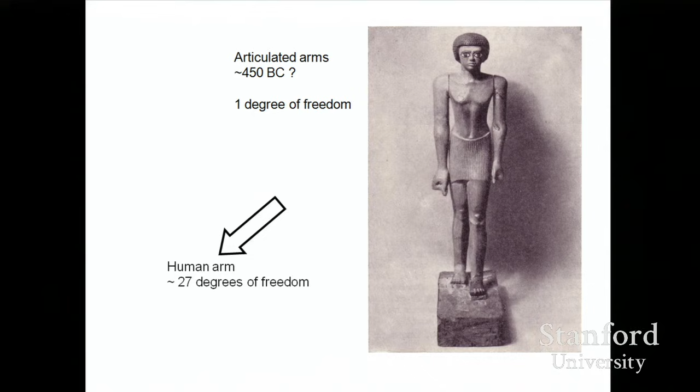Here's the first example of articulated arms. The arms can swing; they have one degree of freedom. By comparison, the human arm has approximately 27 degrees of freedom. There isn't a robot on the market yet that has anything approaching 27 degrees of freedom, but think of all the degrees of freedom and what you can do with it that this kind of machine cannot do.

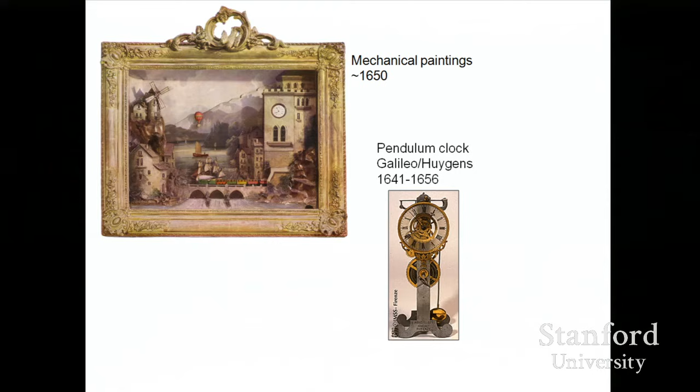Really, the ancestor of this is the pendulum clock, which was invented by Galileo and then perfected by Huygens. And that dates back to a much earlier device, namely the clepsydra, from several hundred years before the Common Era.

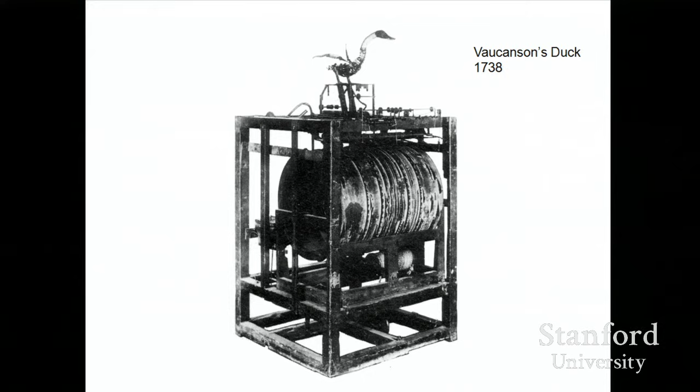In the entire history of robots, I consider this to be the most remarkable of all: Vaucanson's duck. It's shown here so you can see the cams with the covering off. But you have to imagine this covered over and the duck itself covered with feathers so it looks like a real duck. People would pay, come into an audience, sit down, and wait for the operator to start the show. The operator would turn it on, and the duck would look around the room, and you could see from his expression as he stretched his neck in different directions that he was looking for food.

So the operator would put a container with food in front of the duck, and almost immediately the duck would start dipping his beak in and swallowing the food very rapidly. Then you could see from the pained look on his face that he ate too fast and had a stomach ache, and he looks more and more unpleasant as he flaps his wings. Finally, he gives a grunt and relieves himself on the table, and a chemical smell spreads out through the room. It's wild applause at the end of the show for Vaucanson's duck.

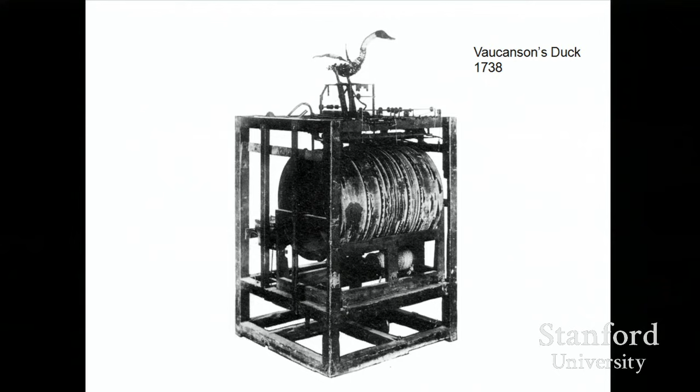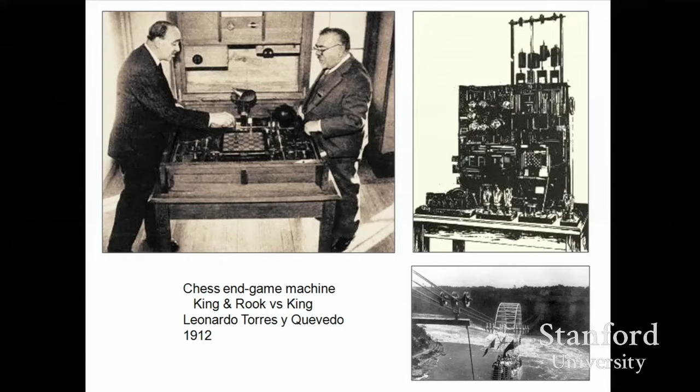The first actual chess-playing machine of any sort was invented by a guy named Leonardo Torres y Quevedo, shown here demonstrating the machine to Norbert Wiener. It's a mechanical and electric machine, and all it can do is play king and rook against a king, which is a rather simple ending. He's a bit of an inventor - he also built some sort of cable car that goes over Niagara Falls, although I doubt it's still in operation.

Some people would argue that the thing that really characterizes animals is their ability to respond to a changing environment, which is the concept of feedback. The first illustration of feedback in engineering is the use of windmills that could automatically steer towards the wind. At least I believe that's the first. If anybody knows of anything earlier, please tell me.

Now I'm going to get into robots in the context of artificial intelligence. There were four challenge areas that people identified. One was, could you make a robot that could play chess, because that would demonstrate intelligence, which is surprisingly animate. Could you have robot vehicles that could demonstrate mobility, or vision systems that could do recognition, or arms that could do dexterous operations?

With regard to chess, in 1968, John McCarthy and Marvin Minsky, the two people who coined the term artificial intelligence, said that within 10 years, a computer program would be chess champion of the world. David Levy, who was a senior master in chess, didn't believe them, and he said he was willing to bet 1,000 pounds that they were wrong. So each of them took on a bet of 1,000 pounds. Ten years later, he won that bet - it didn't take 10 years. It took nearly 30 years, until IBM Deep Blue beat Kasparov in 1997.

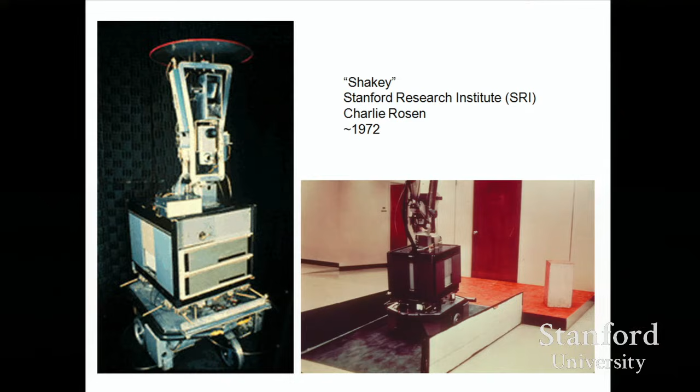Shakey was given a task of planning, which is a wonderful task involving intelligence. Here, Shakey has been asked to knock that block off the platform onto the floor, so Shakey has to first figure out where the ramp is, then push the ramp in place, then roll up the ramp, and then knock the block on the floor. So it's a sequence of planning steps, and the computer could do it.

Hot cell teleoperators were invented around 1944, 1945, because people were starting to build nuclear weapons, and they needed to handle very radioactive materials like plutonium and fabricate things in a shop. And so the issue was that they couldn't actually be there.

So they instituted these systems with a lead glass shielding window where the operator was on the outside, and whatever he did, the pantograph linkage mirrored it so that the same thing was happening on the inside. And a few years later, it was necessary to add force reflective servos because otherwise the operator didn't know how hard he was grasping anything.

The word teleoperator has sort of gone out of vogue. Nowadays, people use the word drone, even if it's not necessarily an air device.

Ernst was quite insistent. He said children learn to function without any prior knowledge of trigonometry, kinematics, dynamics, or control theory, and therefore he absolutely refused to put trigonometric functions into his computer program. It was a matter of principle for him that he wanted to imitate what children were doing.

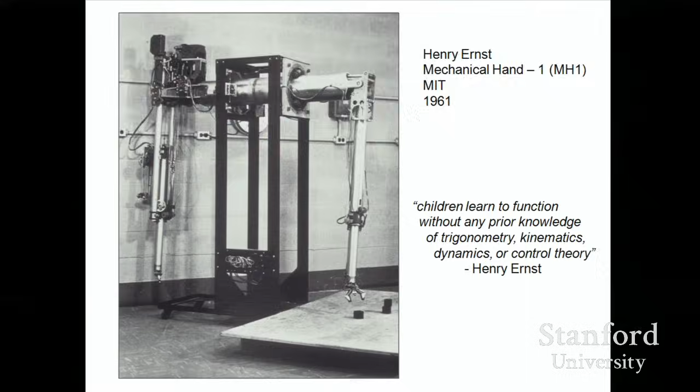1974, other things were happening, by the way. Victor Scheinman had designed the so-called Scheinman arm, and lots of universities were getting them. There's one, I think, that's on display here in the lobby.

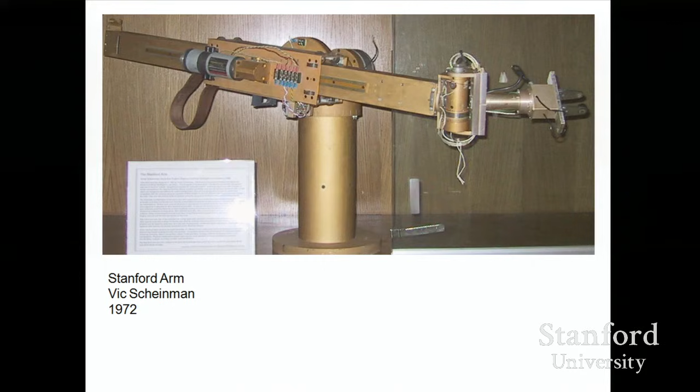And in 1974, at the AI lab at Stanford, Lou Paul programmed it to solve the instant insanity puzzle, where each cube has combinations of colors, and the challenge is to stack them all up so that each column has all 4 different colors. But you can see that when the camera is looking at it, it might see only 2 faces at a time, or 3 for maximum.

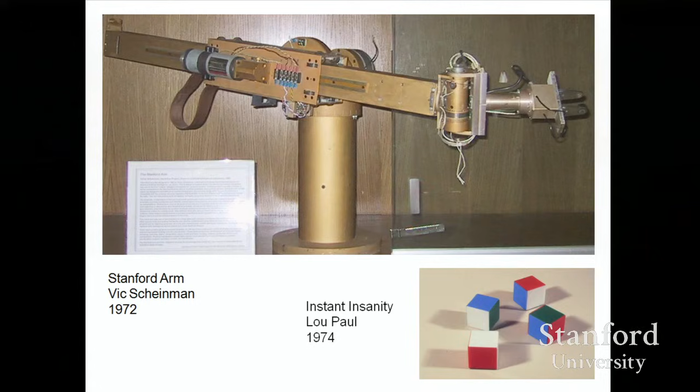So the first part of the program, the robot has to pick up blocks and turn them around so the camera gets to see all the faces. That takes about 5 minutes. It then solves the puzzle. That takes about 2 milliseconds. And then it stacks them up with the solution, and that takes another 5 minutes, and usually the stack doesn't fall down. In the process of doing this, they had to write a very general program, something that could take anything and turn it upside down. Absolutely anything, provided it's a 1-inch cube.

And here's Freddy the robot at the University of Edinburgh. Donald Michie wrote a program on a very large computer for its day. It's significantly smaller than my cell phone today, but this robot arm, which dangles down from the ceiling, is huge. And there's an XY table on the floor, which is again huge.

And initially there are 7 pieces for this. There are 4 wheels, 2 axles, and a body in an aimless heap. And the camera looks at it, figures out what's what, palletizes it, and then over the course of the next 8 hours assembles this. This led to some criticism in England, and I'll talk about that criticism later on.

Now we'll talk about useful robots, because none of these robots was useful. As Aristotle said a long time ago, when the loom spins by itself and the lyre plays by itself, then man's slavery will be at an end.

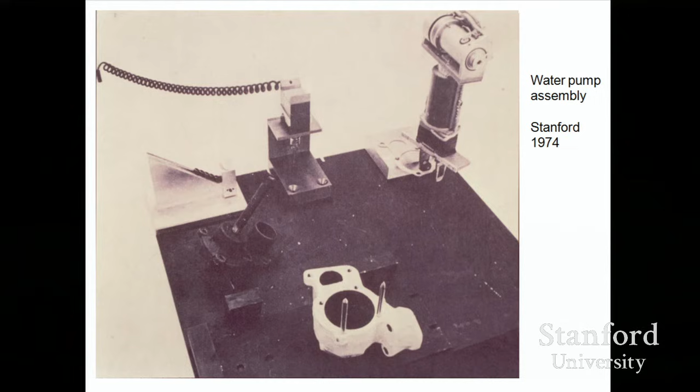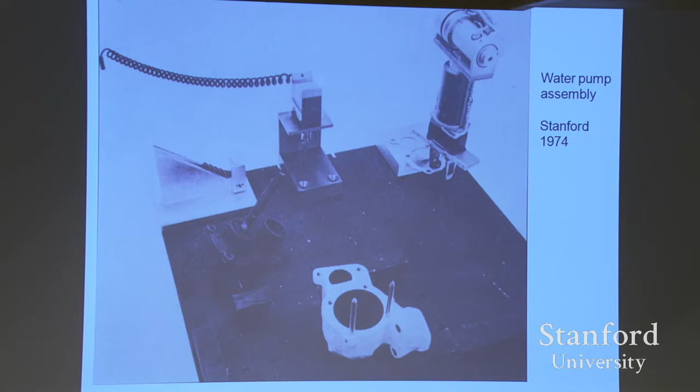In 1974, the people at Stanford decided they would actually try to demonstrate something useful in a robot, and they demonstrated the water pump assembly, where the same Scheinman arm picks up the water pump base, puts it into place, gets 2 locating pins from holders, puts the pins in place, gets the gasket, puts that on, gets the top, puts that on, picks up the power tool, gets a screw from the screw feeder, runs in 1, 2, 3, 4 screws, puts down the power tool, returns the 2 locating pins to their holder, picks up the tool again, and gets the last 2 screws and runs them in. About 5 minutes for the operation, and I've been told it was about 30% reliable. But it is certainly the first demonstration the robot could do anything remotely useful.

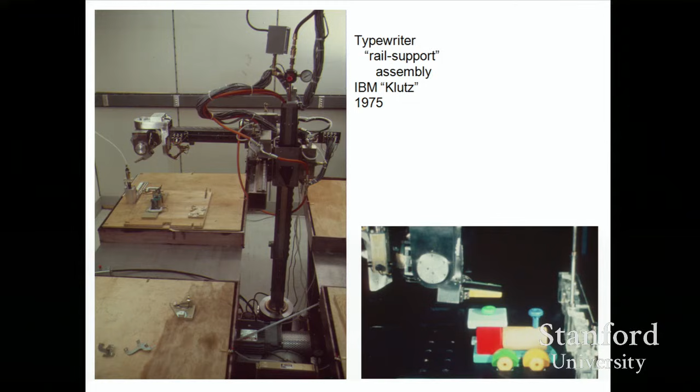Shortly thereafter, a project was started at IBM. I was one of the people on that project, where we put together a robot we affectionately called Klutz. The first thing I programmed it to do was to assemble the 16 pieces of the Mattel Build-A-Train. Within a year after that, other people were programming it to pick up power tools and assemble what's called the rail support of an IBM Executive D typewriter. It was kind of impressive to watch it assemble 25 pieces from that typewriter.

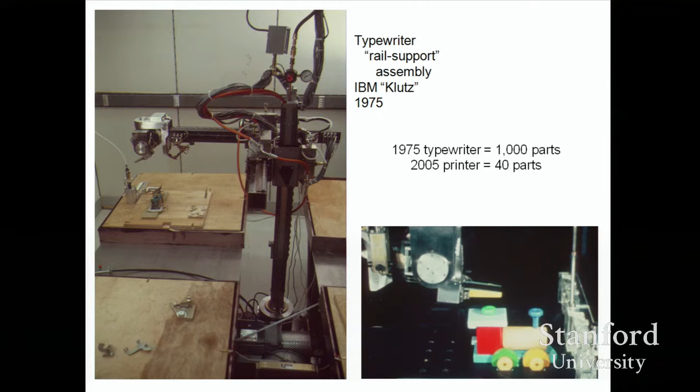But there's a lesson in all this, and that is that this 1975 typewriter had 1,000 parts. By comparison, in 2005, I added up all the parts in a typical HP printer. It was about 40 parts, and I think it's probably gone down since then. The point is that designing things for ease of assembly very often eliminates the need for robotics completely, because it gets so easy to assemble that people can do it very, very quickly. Assembling 1,000 parts was a big challenge. Assembling 40 parts or fewer is not much of a challenge anymore.

I enjoyed writing a program. There was an infrared sensor, an emitter in one finger and a receptor in the other finger. So I wrote a program that simply waited forever, and if something went between it, it would try to grab it, which would make it the world's 2nd most expensive flycatcher.

That, of course, leads to the natural question: what would be, in all history, the world's most expensive flycatcher? Does anybody know? Well, it's Barry Bonds. Anyhow...

Speaking of baseball, around 2005, there were some reports out of Japan that they had developed a robot batter that could hit a ball at 200 miles an hour, and a robot catcher that could also do that. I'm skeptical when I see balls on the floor here that clearly it's fouled off or missed completely.

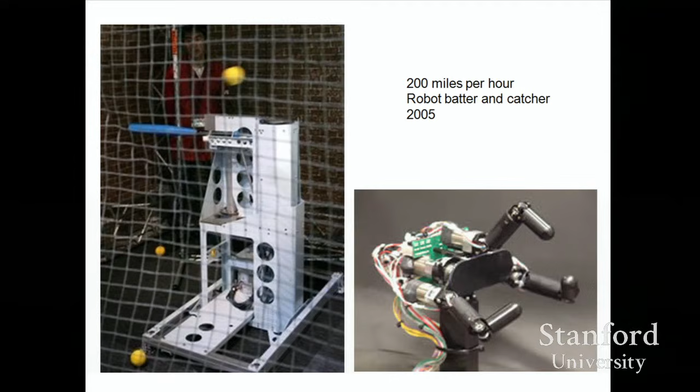1983, IBM came out with a product called the box frame robot. Believe it or not, that's me in the picture. I had a lot more hair then, and it was a different color. One of the things that we did in the early years was see if we could get it to pick up a raw egg, and it's astonishingly easy to get it to pick up a raw egg. There's no challenge at all in that.

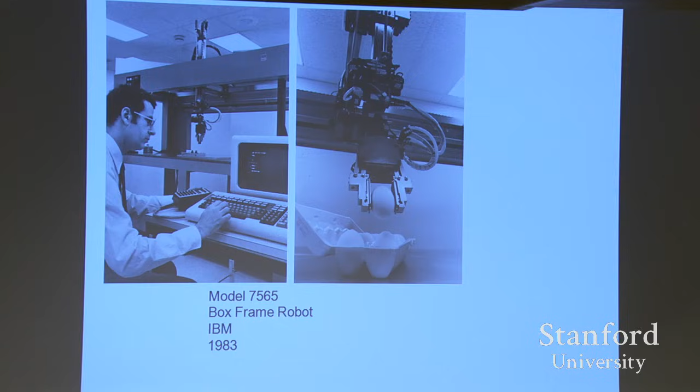Now, you may think that this is a strange product for IBM to be selling, and they only sold it for a few years before giving up on that field. But in fact, back in 1930, IBM was selling a precision cheese slicer, which is even more strange.

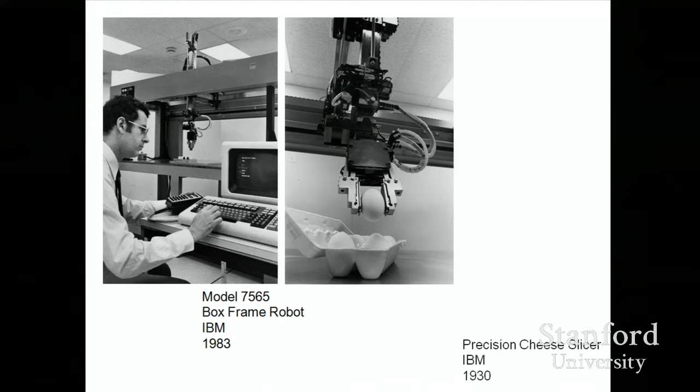When we were doing this, some people said, hey, wait a minute, robots are going to take away the jobs of a lot of people. We were skeptical of that at the time. In fact, we had a very fun robot project going at IBM. By then, I had become the manager of it. We put together a robot songbook, and one of the songs dealt with this.

He don't put dips in, he don't wrap wire, so them that wraps it cannot retire. But old man robot, he just keeps rolling along.

But the reality is that all the people who put dips in or wrapped wire, they better have retired by now. Now, an awful lot of people who think that robots are going to have vast influence in factories have never been in factories. And if you're one of those people, I would urge you to go see some real factories, because in real factories, what you find a lot of is hard automation of things called transfer machines.

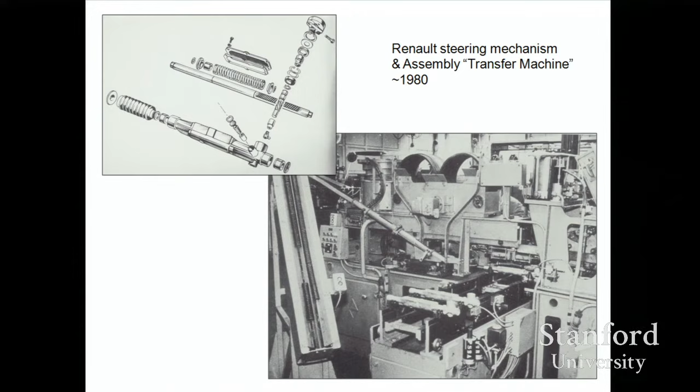Here's the Renault steering mechanism in 1980, which had about 30 parts to it. This room-sized machine can bang them out at about 1 per second. Of course, a machine like that in 1980 would have cost at least $1 million, maybe a couple million. And all you had to do was make one minor change, like you want this to be slightly bigger or out of a different material, and all of a sudden the machine wouldn't work. So it's not programmable in any sense. And programmability is a great virtue in factory machines, but programmability does not necessarily mean robotics.

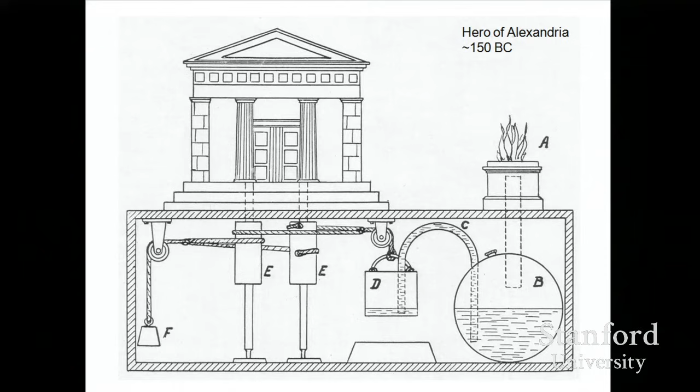Getting back to history, ancient history, here's a wonderful machine from 150 BC approximately. It's an automatic doorman. The idea is you build a fire at A, that heats up the compartment B, and as a result increases the air pressure here, so the water from B moves over the siphon C, D becomes heavier, and through these pulleys and a counterweight F, the capstans rotate and the doors open. And then when the fire goes out, the doors close. I don't know if it was ever built.

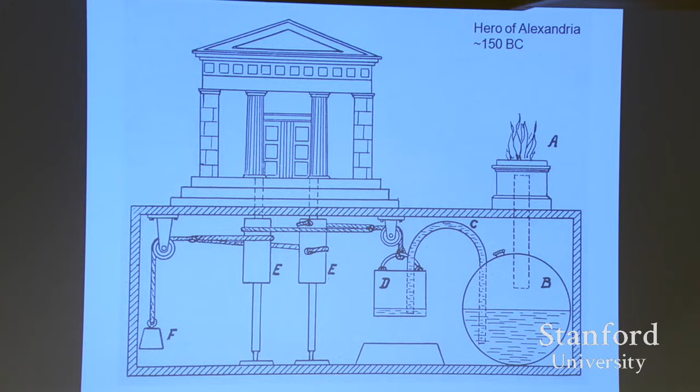Punch cards then became important in the subsequent years. A group calling themselves the Luddites were quite unhappy with machines of this type, and so for years they went around smashing machines until, I think it was Nottingham, the British Army rounded up 50 Luddites and executed them, and then that sort of did away with that movement for a while. There's a lot of Luddites still around today though, I think, neo-Luddites.

Then along came Charles Babbage, first with the difference engine and later with the analytical engine. And somebody realized the analytical engine needed a programming system, and that was - the first programmer was Ada Lovelace. Ada Lovelace is the only daughter of Lord Byron, which ties together with the fact that as a child she would have been growing up knowing Mary Shelley and would have been quite interested in the general topics of automating what humans do.

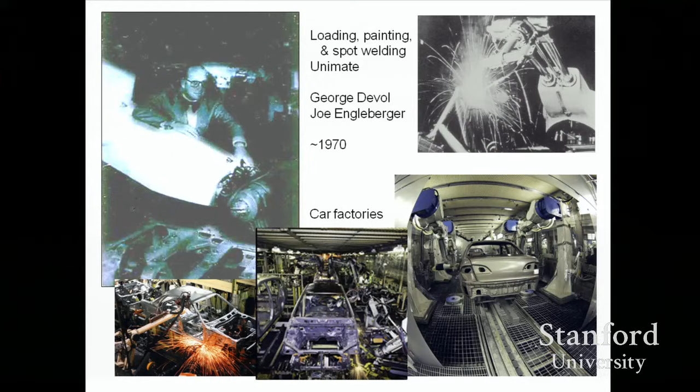The original Unimate robot was invented by George Devol, but he didn't have an opportunity to actually develop and market it, because he worked for AMF at the time, American Machine and Foundry, which had invented the automatic pin setter for bowling alleys. And AMF looked at everything and said, it's not another automatic pin setter, we're not interested - it didn't matter what it was. So they weren't interested, but along came Joe Engelberger, he was interested. So he formed a company and George Devol joined it. They came out with this machine called Unimate. And then they found that American car factories didn't want them, so they moved to Japan, and they had no difficulty convincing people to use it. And Japan used them all over. But as I say, nowadays, any car factory you go to visit has widespread use of robots.

Here's a really wonderful robot from relatively recent years. This is one of Amazon's factories, but this is Kiva Systems, so you can look them up on the web. Imagine a factory in which there are a warehouse in which lots of things are stored on devices that look like this, that have empty space underneath. Huge factory, the size of 3 football fields or more.

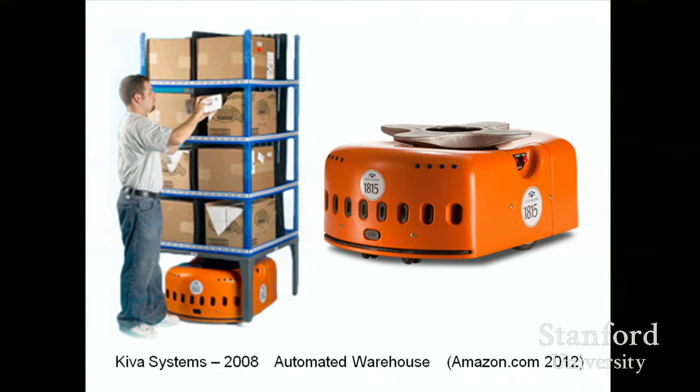A request comes in that a specific package has to be sent out to somebody, and it has to have one of these and one of these. These robots go scurrying all over the factory. They know where to go. The mechanism on top screws up to lift the tower, then brings it slowly down a narrow aisle, moves to a rapid street, and goes zipping down delivering these towers with a laser pointing to the specific bin that the operator should take something from. An operator then takes things - here's your first thing, it moves on, here's your second thing - and during their spare time, these get recharged at a recharge station. There are good movies of this on the web. I recommend you see them.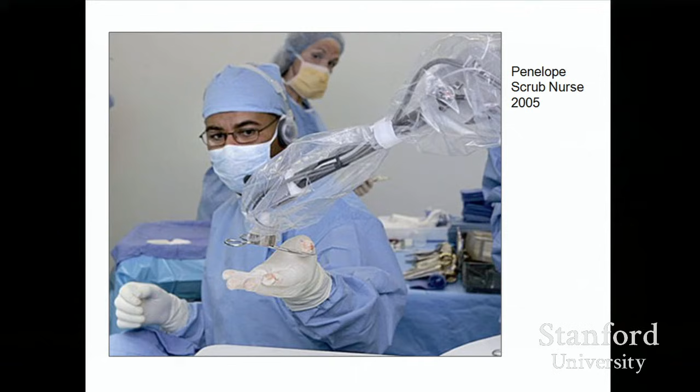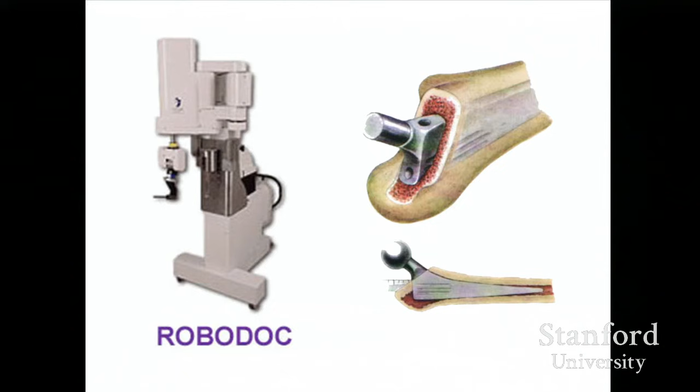What about medical applications? Well, here's a research effort: Penelope, Scrub Nurse, in the year 2005. I worked on a project demonstrating feasibility of ROBODOC, getting robots to precisely grind out the inside of a femur to accept a cementless hip implant. Subsequently, a company was started up with venture funding, and one of the people in my project joined it and became the head of that project, but they had difficulty getting FDA approval, and it took years, and in the meantime a German company got more rapid approval. So that didn't work out.

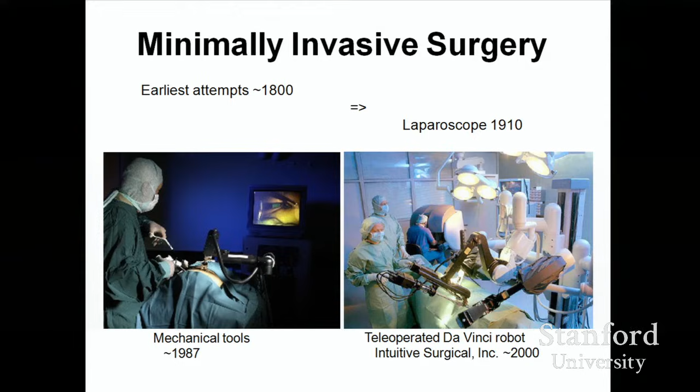Minimally invasive surgery is an application area for robots. The first concept dates back to 1800, but it wasn't until a laparoscope was invented around 1910 that there was some progress made. Around 1987, if you looked in an operating room, you could see a scene like this where a surgeon was holding the business end of a tool. The patient is lying on the table, he's been inflated, and one of the tools is a camera, so he can see what he's doing. Because the midpoint of the tool is not moving, he's moving in a mirror image of the actual motions.

Then you advance just a few years to the year 2000, and the surgeon has moved - he's now sitting at a computer station looking at a display, and he's controlling robots which are manipulating the tools.

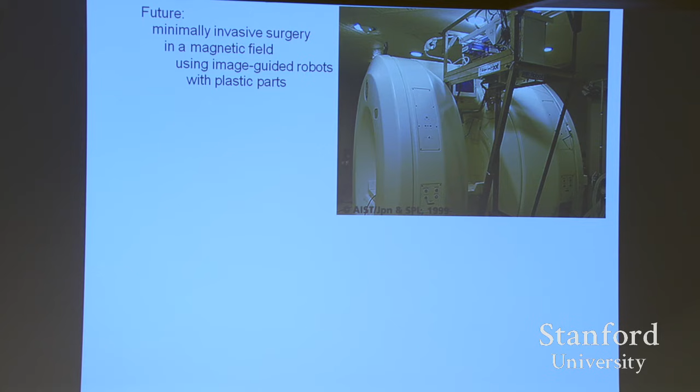In the future, you can expect minimally invasive surgery in a magnetic field so that MRI can be done at the same time that surgery is being done. Of course, the robots will have to be made out of plastic, because the magnetic fields are so enormous. You can also expect minimally invasive surgery using intestinal crawlers, such as this one, which can clamp on and do something. And then in the distant future, using nanorobots. But I want to be very precise here - you can expect this, but I don't believe that's ever going to happen.

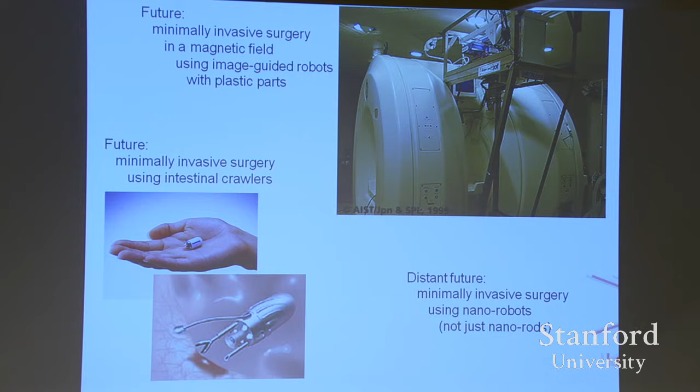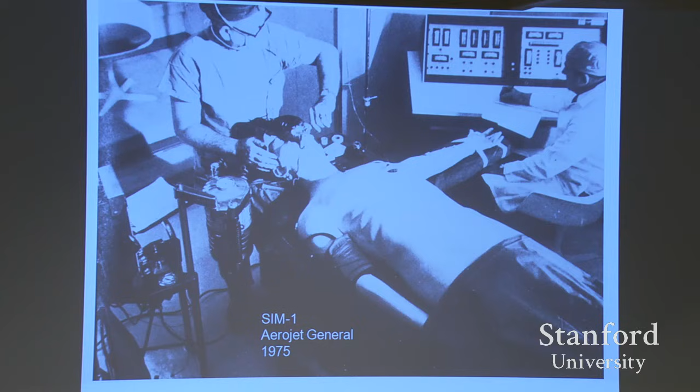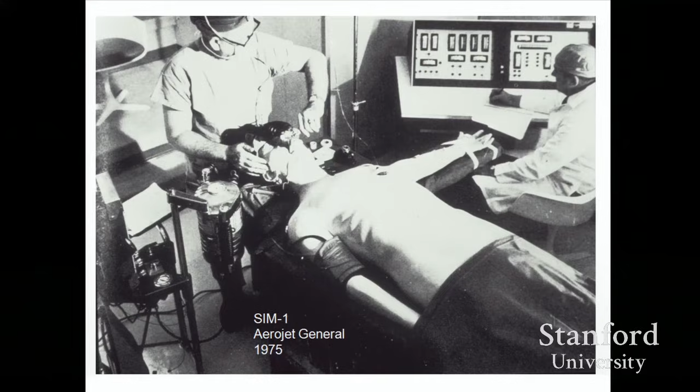Now here's a wonderful medical application. This is SIM-1, built by Aerojet General in 1975. You see it here at UCLA, and it's being used to teach medical students how to perform tracheotomy operations. It has a pulse and respiration, and they're performing a tracheotomy operation on it, and if they do it wrong, it dies. That's SIM-1. SIM-2 automatically sues for malpractice.

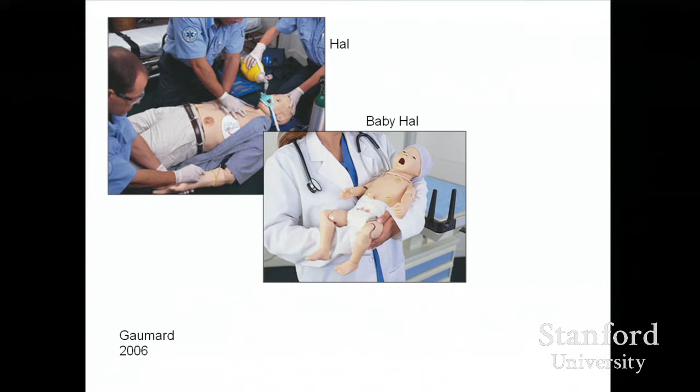The more modern version of this is Hal. He's just fainted because his girlfriend had a baby. And here you can see his girlfriend and the baby also. Gaumard built these devices.

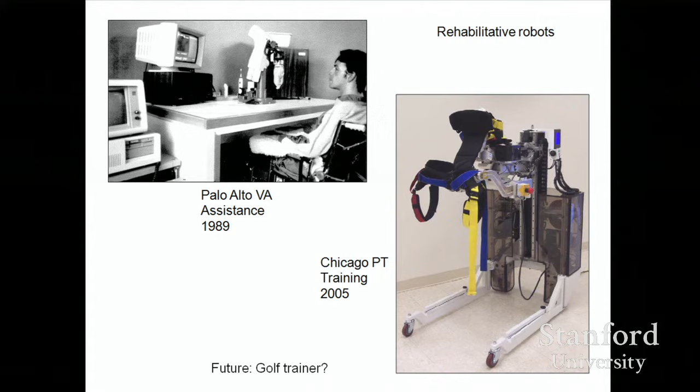Rehabilitative robots were pioneered by the Rancho Los Amigos Hospital in Downey, California, but a lot of work has been done also at the Palo Alto VA Hospital. Here's a scene in 1989 when you have a quadriplegic, and the challenge is to get the robot so that it can do some feeding operations, presenting drinks or food without stabbing him with a fork. Here you see a physical trainer intended for teaching somebody how to walk after they've had a stroke and now have difficulty walking, so they get strapped in and guided through the motions. The idea is eventually they learn the proper motions. Although I think there would be a bigger market for doing the same thing with a golf swing. Nobody has tried that yet.

Here's the Lear-Siegler Mailmobile in 1980, following a chemical line on the floor as it delivers mail. A more practical, more significant service application is hospital delivery for meals and linen, and providing a teledoctor who can have a discussion with a patient even though the doctor is far away and doesn't have time to commute in Los Angeles traffic.

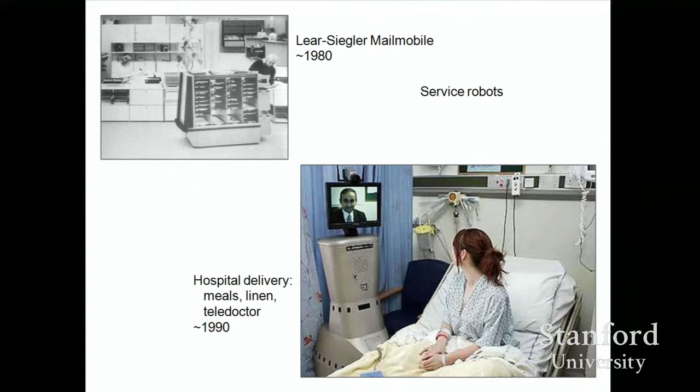Recently I've seen some speculation that with Ebola, or possibly other diseases, it would be possible to develop robots that could deal with that so people wouldn't have to be in the dangerous environment. But I'm a little skeptical that would be feasible, because the operations that need to be done are very dexterous operations. Now the topic of military robots.

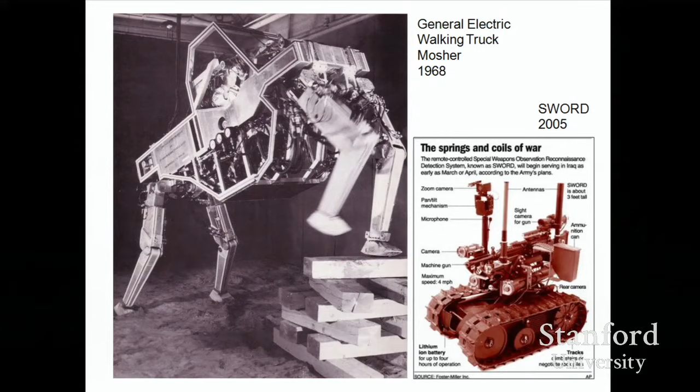A wonderful example from history is this walking tank that can leap across a boulder-strewn field rather than navigating around the boulders, therefore presenting less of a target, although if you shot out some of the hoses, it would have to limp.

And here's one of the drones that I think was deployed during the Iraq War.

The DARPA Grand Challenge in 2005 was to get a vehicle to drive about 200 miles across the desert. The winner, of course, was Stanford. Then the following year, the challenge was to drive in a sort of simulated urban environment. The winner this time was CMU, with Stanford coming in second. And there are clearly non-military implications of this.

I mean, all of us have probably seen the Google self-driving car driving down the road. And it's really come a long way, because it now goes about 55, 60, 65 miles an hour.

I wonder what the ethics is, though, because when I drive down the freeway, typically everybody goes at least 5 miles over the speed limit. Now, would a robot car stick to the speed limit, or would you have the option of overriding it? And if it had an accident, who would be considered at fault? Because you've overridden it, and can it get a ticket if it's speeding?

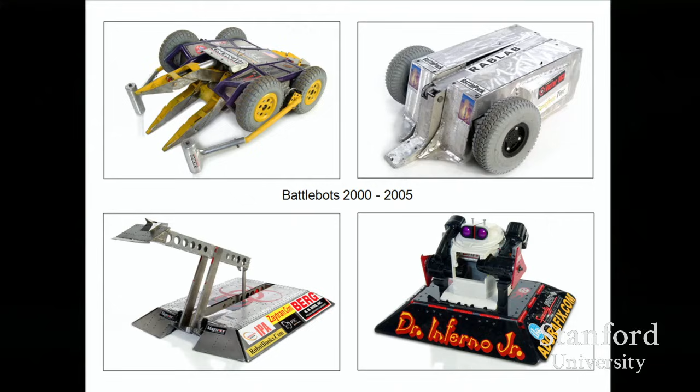In the period from 2000 to 2005, there were lots of video programs featuring battles between so-called battle bots, which were all radio-controlled vehicles with all kinds of terrible weapons.

It wasn't until Isaac Asimov came along that one had the idea that robots would be benevolent. He invented the three laws of robotics: first, that robots may not injure people; then, they must obey orders; and finally, they must protect their own existence.

There's a whole series of short stories he wrote based on the ethics of conflicts between these different laws. And then there's a final story in which he creates a machine called Multivac, which is, of course, built from 1 million vacuum tubes, but that was a long time ago.

It's given the challenge: is there a way of reversing the second law of thermodynamics? Multivac computes for more than 1 billion years, and finally figures out the answer, looks around to tell somebody, and there is no sentient life left on Earth. Multivac feels rather frustrated by that, and decides he's going to try it himself. So Multivac says, 'Let there be light,' and the universe starts over again.

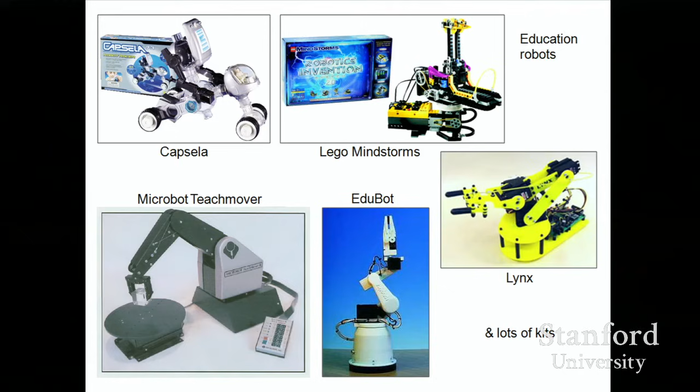Anyway, education robots, you see some of them around here. Robotics is very useful for education because it's cross-disciplinary: electrical engineering, mechanical engineering, computer engineering, and industrial engineering.

Speaking of dinosaurs, let's get to entertainment robots. There are lots of robot dinosaurs starting around 2004, and robot fish starting around 2004.

Here's the 26-degree-of-freedom walker by Honda called Asimo. I've seen this in a show here at Stanford about 4 years ago.

Then there are whole lots of companies throughout the Far East, particularly, that have built humanoid-type robots that do not do anything useful.

And then there are so-called robot musicians who simulate playing music but don't really do it, although this one really does play the drum—these are not really playing trumpets.

Then a more recent challenge has been, how do you do robot cooperation? Here's an example from 2006 with robots that learn to cooperate to compete in a miniature soccer game.

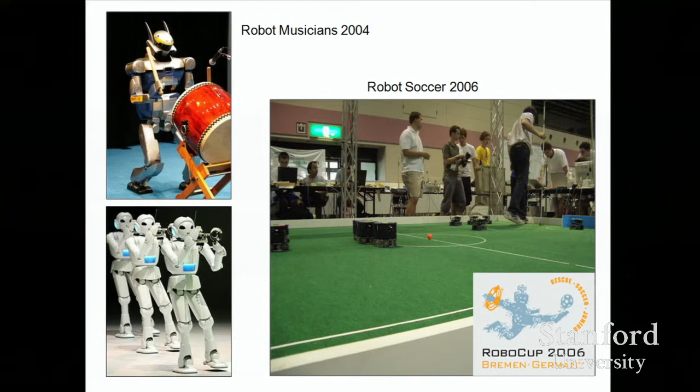And actually earlier this year, around March, in a life-size soccer game, a robot actually scored a goal against an inept human goalie. It's kind of startling that that could be achieved.

Here are robot dancers, and that brings me to the topic of female robots. That theme originated in the Tales of Hoffmann with a story called The Sandman, which was the inspiration for the ballet Coppelia by Delibes in 1870, in which the toy maker is so drunk that he doesn't realize—he thinks this is a toy that he built. In fact, it's a teenage girl who's broken into his toy shop and is pretending to be a toy.

The movie Metropolis by Fritz Lang in 1927 featured a robot in the image of the heroine Maria. The mad scientist Rotwang created this robot with the intent of having it instigate a class war that would destroy everybody. So she's not that nice.

You see the same theme of female robots in other examples more recently, in 1972's The Stepford Wives, in which the men of Stepford, Connecticut, led by a former Disneyland technician, slowly exterminate their wives and replace them with robots who are absolutely indistinguishable from their wives in every respect, except that they never get headaches.

There's also the inverse theme, a male robot with a human female, exemplified in the movie Demon Seed with Julie Christie, where the robot takes advantage of her. I'm told that in the entire history of computing, that is the only documented example of a robot failure that can't possibly be blamed on software.

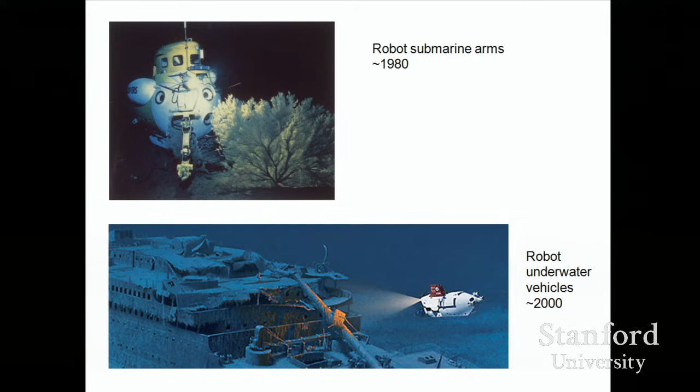Finally, there's hazardous environments. Here you see robot submarine arms in 1980, so that the robot can harvest coral to be sold to tourists, and robot underwater vehicles. Of course, robot vehicles were very important for analyzing the Titanic.

In terms of flying, people tried for a long time to build robots that would fly, but the first example of it is 1984, when MacCready built a robot pterosaur that could actually fly, and there are cheap versions of this available. A modern version is the military version called Predator.

There are more modern versions, drones. These things are shrinking, and you can buy quadrotors at many places today which can carry a camera, and those can be considered drones.

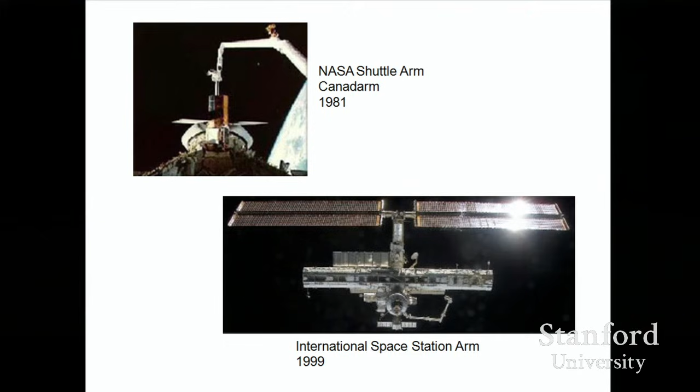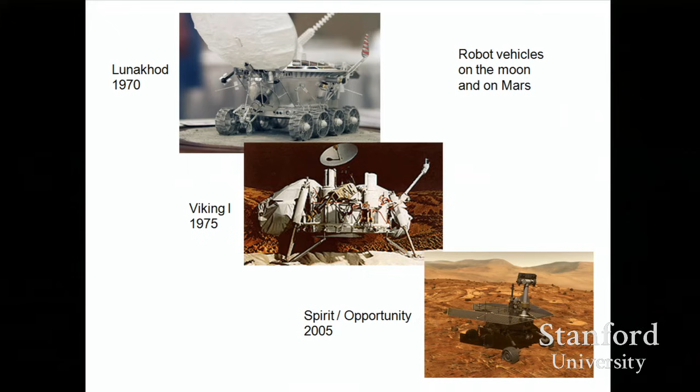A really hazardous environment is the inside of a volcano. So here's one that was built at CMU.

Yeah, but that one didn't walk more than 20 feet. It fell in, I think, or something. No, the fiber optic cable broke. Oh, was that discussed at the USGS last week? Okay.

And putting out fires may seem like a silly application, except that last year I think 19 firefighters were killed, I forget if it was New Mexico or Arizona, so it's not such a silly application.

But when we come to the toilet application, the original idea would have been, can you make a robot that would go in with a scrub mop and clean out the toilet? That's not the way you do this. You redesign the whole toilet experience.

In the same way, a long time ago, McCarthy and Minsky said they would like to get a robot and program it to put together a Heathkit with 1,000 parts to build a television set. A television set doesn't have 1,000 parts anymore, Heathkit is out of business, you don't build television sets that way. You redesign for automation, you redesign for ease of assembly.

Now I'm going to speculate in the last few minutes of this talk on the future of robotics, but I've got to tell you, speculation is dangerous.

As Yogi Berra, the former Yankee catcher, said, prediction is very difficult, especially about the future, except that Yogi Berra didn't invent that quote. Niels Bohr said it long before Yogi Berra said it, except that Niels Bohr didn't invent it because Robert Storm Petersen said it, and before him, Mark Twain said it. I don't know how to go any further back than that.